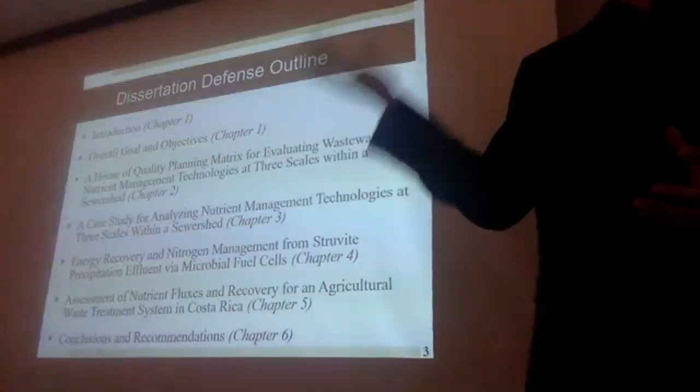So just a little bit of an overview of what I'll be covering today. Chapter 1 will be the introduction, and then chapters 2 through 5 are my 4 primary research topics. Chapters 2 and 3 are about how to select different technologies to manage nutrients. Chapter 4 is based on my laboratory work with the microbial fuel cell, and chapter 5 was based on my work in Costa Rica looking at managing agricultural waste. And then chapter 6 will be conclusions and recommendations.

This slide is probably familiar to many of you, but my work is motivated by nutrients, and nutrients come from many different sources. The sources that I'm primarily concerned with in my research are both centralized treatment plants and septic tanks, and chapter 5 will look into agricultural runoff as well. The issue is that when there's excess nutrients that end up in water bodies, it causes algae blooms. And when the algae blooms decompose, it uses up the dissolved oxygen in the water, which prevents the flourishing of aquatic life. So we're looking at ways to minimize this excess nutrient runoff to improve aquatic life. My work is also motivated by the Sustainable Development Goals.

These were developed by the United Nations, and they're in effect between 2015 and 2030. The one that I primarily interact with is Sustainable Development Goal number 6, which is clean water and sanitation.

But one of my other goals is to integrate not only SDG number 6, but many other sustainable development goals that can be integrated with treating wastewater. This includes, for example, zero hunger - if we can develop fertilizers that can be used to grow food. We can also turn wastewater into a source of energy, which leads into goal number 7. And we can treat wastewater in effective ways to reduce greenhouse gas emissions, acting for sustainable development goal number 13.

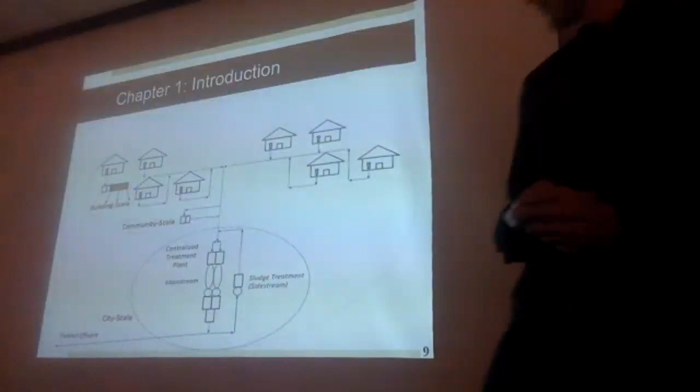One of the primary focuses of my research is this idea of managing these nutrients, not just at the centralized treatment plant. So what I have here is we can manage nutrients at the city scale, whether that's mainstream treatment or sludge treatment, and we have this nutrient-rich centrate that's often returned to the head of the plant. That's another place where we can manage nutrients.

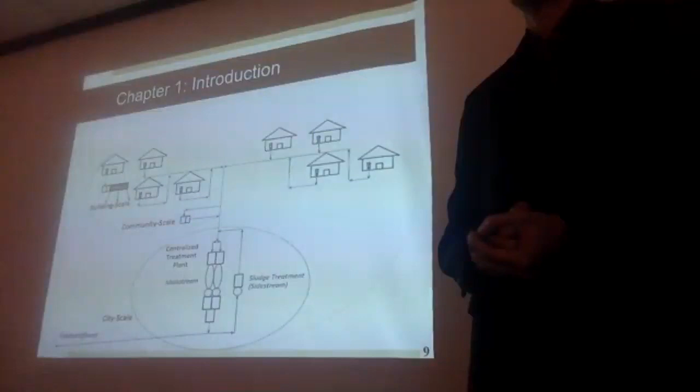But two other places that we can manage nutrients as well are at the building scale. For example, a building has a toilet - what if we source separate urine and we're able to manage nutrients at that scale? And what if we can manage nutrients at the community or neighborhood scale, where there's a group of houses? I'll be looking at this concept of managing nutrients at different scales throughout my presentation.

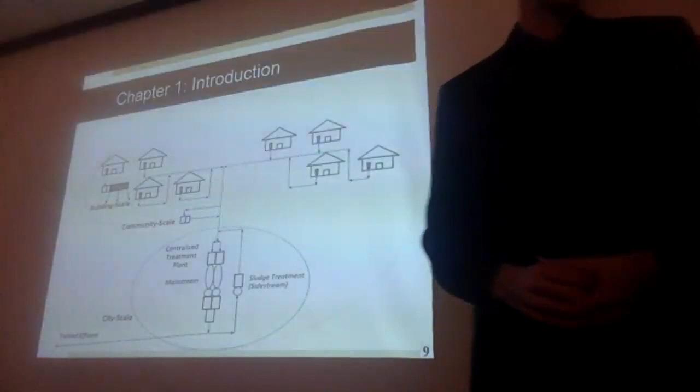So the overall goal is to contribute to the achievement of multiple sustainable development goals through the removal and recovery of nitrogen and phosphorus from a variety of influents and also at a variety of scales.

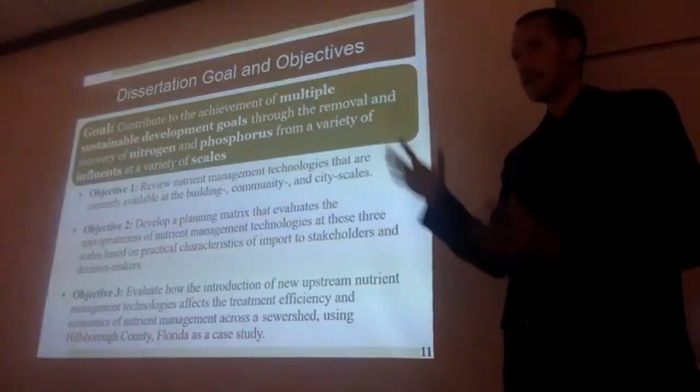So objectives 1 and 2 are looking at different nutrient management technologies that are available at these 3 scales. Objective 2 looks at how to evaluate these different technologies, how we can choose one technology over another, and at what scale it's most appropriate. And then objective 3 is looking at how to apply this planning matrix to a case study of Hillsborough County.

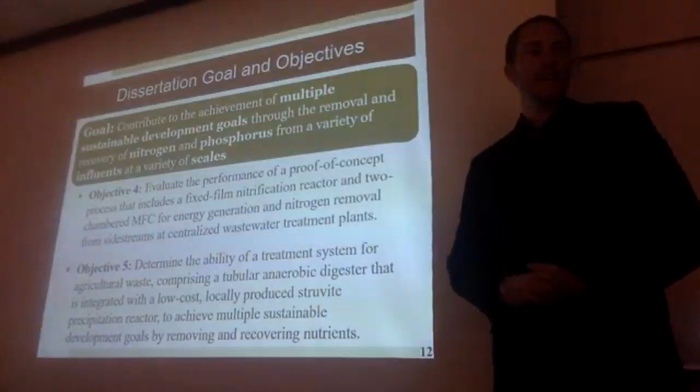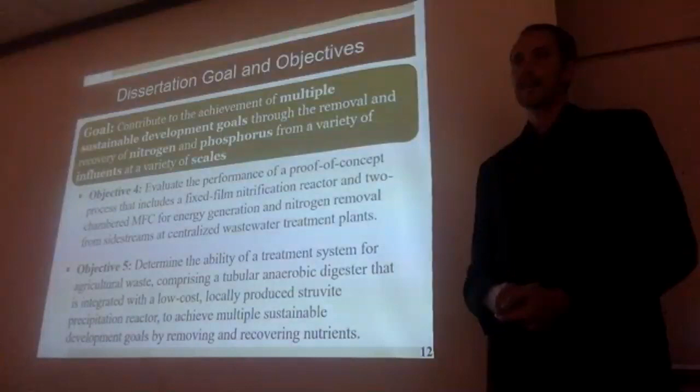Objective 4 is looking at how to use a microbial fuel cell to manage nutrients and recover energy at the side stream at a centralized wastewater treatment plant. And then finally, objective 5 is my Fulbright work, looking at how we can treat cow and pig manure using anaerobic digestion and also struvite precipitation.

So first, I'll be diving into chapter 2. This is looking at reviewing the different technologies available and figuring out what nutrient management technologies are most appropriate at the different scales. This is work that has been published previously in Environmental Engineering Science.

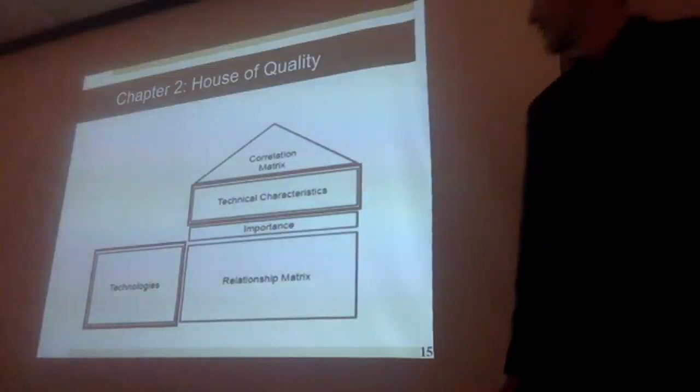So here we have a house of quality, and this is basically just a way that we can look at different technologies and figure out which one is most appropriate. The two most important parts of this figure are the technologies - we'll list all the different technologies available here - and the different technical characteristics that we can evaluate these technologies by. These different characteristics will also have different levels of importance.

So here are the technical characteristics. There are 10 of them that we used for this study. They go from ease of operation and maintenance - these are some of the things that Jeanette was previously talking about. To be appropriate, we need to consider a lot of things, including how much does it cost, is it a mature technology, how is it impacting the environment, how is it doing in removing nitrogen and phosphorus, and also, does it look pretty?

So we combine these into this house of quality matrix, and there's a lot going on here, so I want you to focus just on what's in this red box. Again, we have the different technical characteristics abbreviated here at the top, and here we have some different technologies that are available at the side stream for sludge treatment and managing the nutrients in the liquid effluent from the side stream. These different symbols here - there are 5 different symbols: minus minus, minus, 0, plus, and plus plus. Minus minus received a score of 1, plus plus received a score of 5. We basically computed these final scores by multiplying the importance factor - for example, here 0.8, this would receive a score of 2 - multiply those together, and then sum across to get a final score.

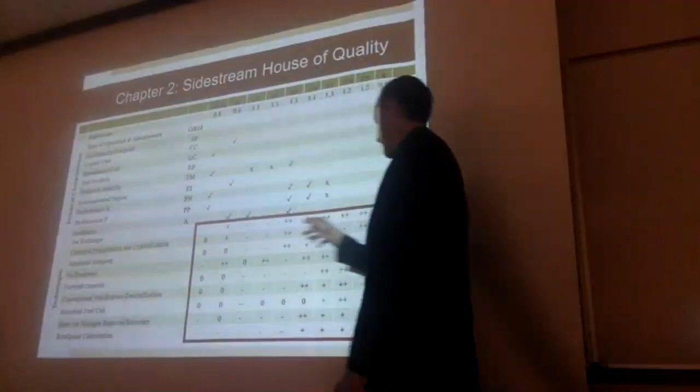So this is looking at side stream. No treatment received a score of 32. But as you can see here, there are a few different technologies that score well above no treatment. So using this tool, we can say, hey, maybe you don't currently do anything for side stream treatment. Here's some technologies, for example, that a municipality should consider at their plant, given these different characteristics and how important it is to that particular municipality.

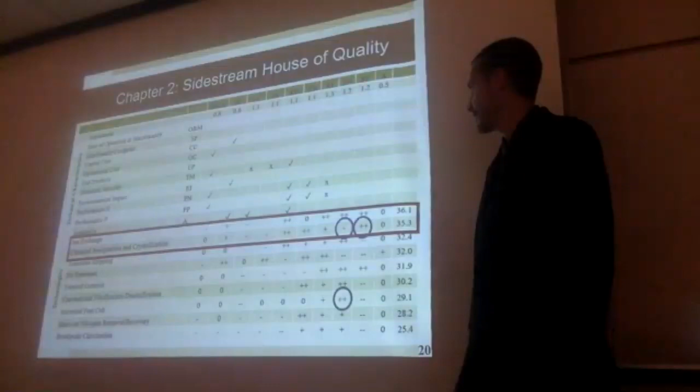So one technology that I'll be diving into deeper is chemical precipitation and crystallization. You can see here with this plus plus, it does a great job at phosphorus removal. It doesn't do as good a job at nitrogen removal, but there's also an opportunity to couple different technologies together. So for example, in a later chapter, I'll be looking into, could we couple chemical precipitation and tie that into, for example, microbial fuel cell to remove nitrogen.

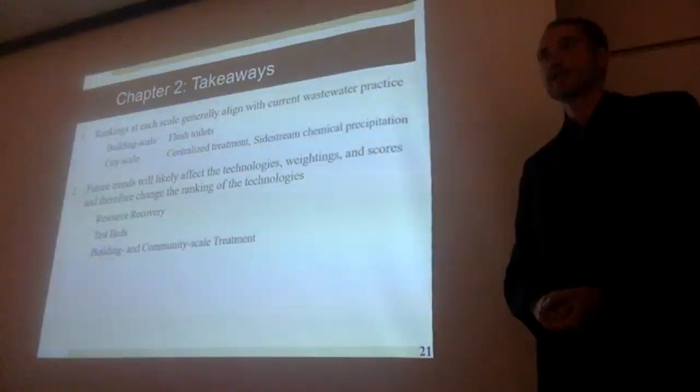So some takeaways from this chapter: the rankings at each scale generally aligned with current practice. What that meant: the building scale was simply flush toilets because they're easy to maintain. Everything flows down to the centralized treatment plant, and more facilities are now implementing chemical precipitation at the side stream. Another note here is that future trends will likely affect the technologies available and their different maturity levels.

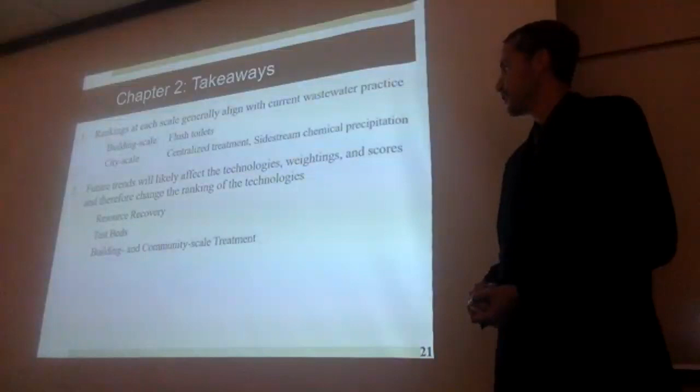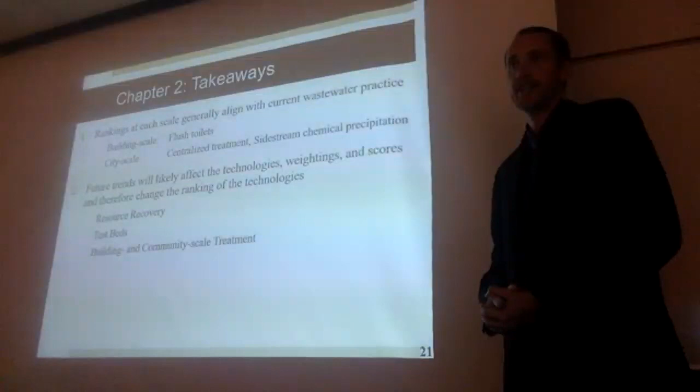So as we continue to see trends of resource recovery, we not only need to remove nutrients, but also look at recovering nutrients, energy, or water. Test beds, the ability to test these different technologies, can lower the risk factor for different municipalities to implement them. And also looking at the advantages of building and community scale treatment.

What if, for example, there's a golf course way at the neighborhood scale that's really far from the treatment plant? Does it make sense to do treatment closer to where, for example, it could be used on a golf course in the future?

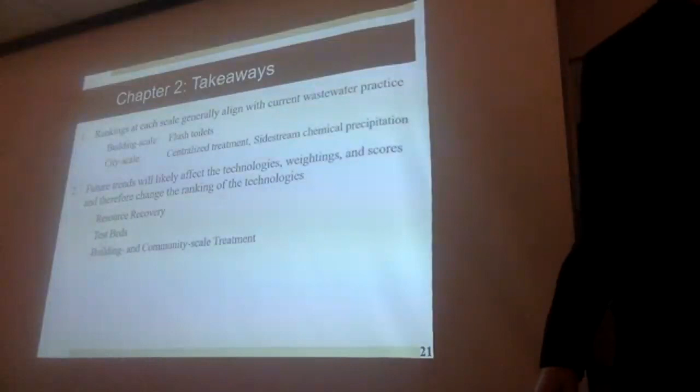So moving to the next chapter, chapter 3, this was looking at the same House of Quality tool, but applying it to a case study of Hillsborough County. So I was looking at how these different nutrient management technologies at these 3 different scales would affect centralized treatment.

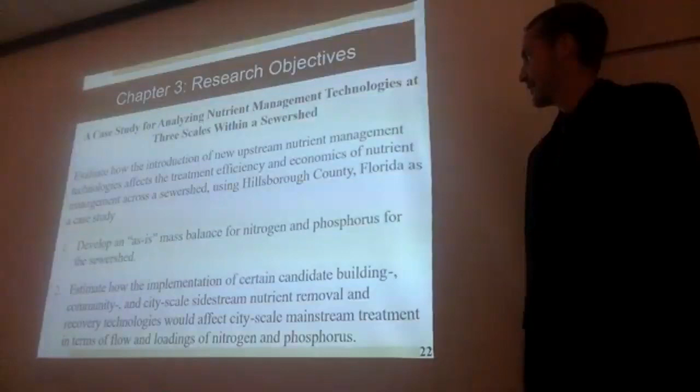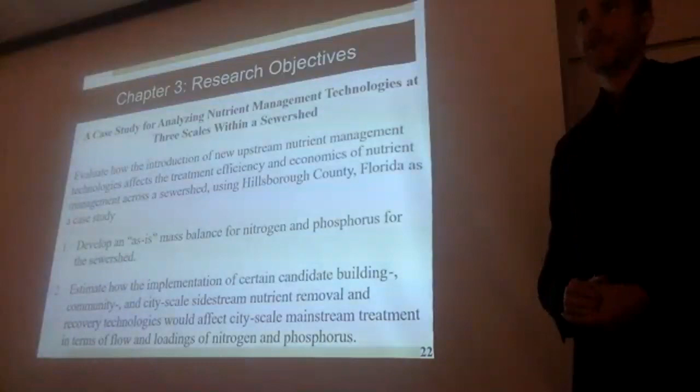So in order to achieve this objective, we looked at completing a mass balance for nitrogen and phosphorus, and then seeing how we could estimate how these different technologies would affect the different nutrient fluxes of nitrogen and phosphorus entering mainstream treatment.

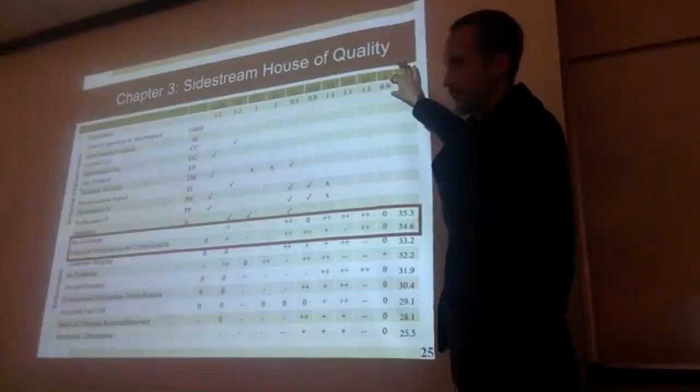So applying this, here's what the House of Quality looks like. This is using the same tool as chapter 2 and applying it to the case study of Hillsborough County. The importance factors are slightly different - these were given to us by a representative from Hillsborough County. You can see the top 2 performing technologies here are ion exchange and chemical precipitation.

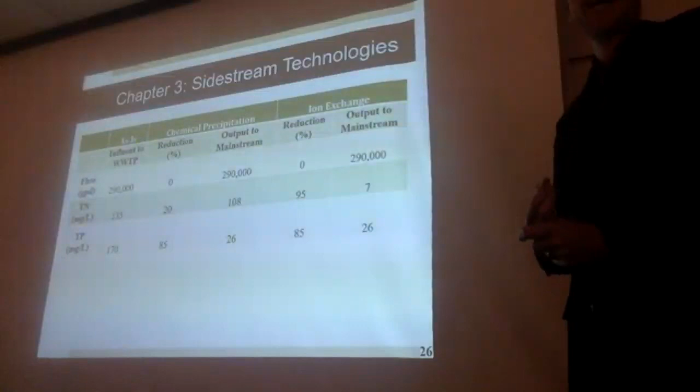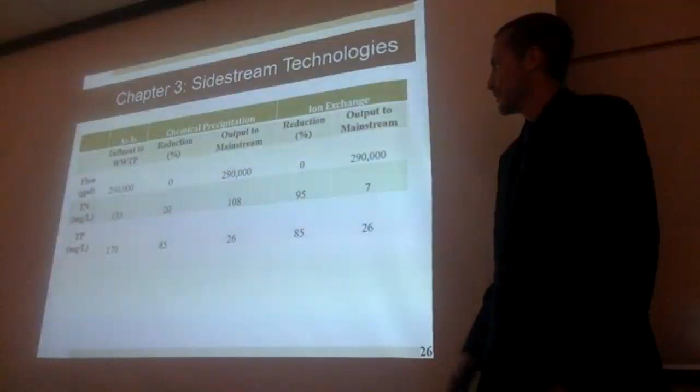So here I have a slide that looks at two technologies, chemical precipitation and ion exchange, and examines if you implemented these in the side stream, how would it affect flow, nitrogen, and phosphorus. Both technologies don't do much in terms of reducing flow, but chemical precipitation reduces total nitrogen concentrations by 20%. Ion exchange can reduce up to 95%, and both technologies remove approximately 85% of total phosphorus. So we can see this has some impacts for the fluxes entering the mainstream treatment.

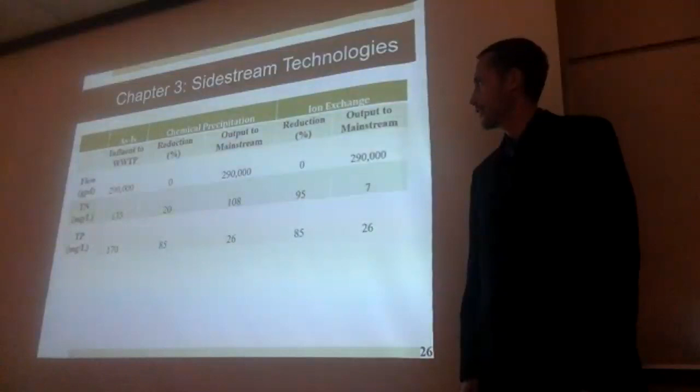For example, if you have a total phosphorus concentration of 170, with 85% removal, now you only have 26 milligrams per liter entering the mainstream. This can have significant effects on mainstream treatment if you do this at the side stream. So this same exercise was carried out with the top scoring technologies at the building scale and the community scale, and here is a summary of some of the results.

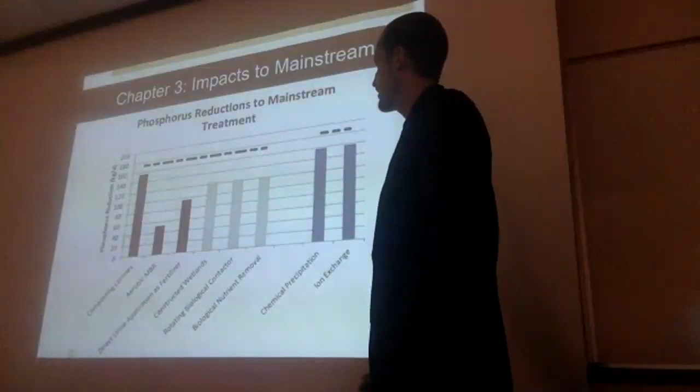So this is the same exercise, but looking at phosphorus reductions. Here we can see that just as we saw higher concentrations of phosphorus from side stream, if we want to reduce phosphorus loading to the mainstream, these bars here are much higher. So if we do technologies like chemical precipitation or ion exchange, this is the amount of reduction we can see going back to mainstream. Looking again at the building scale technologies in black or the community scale technologies in gray, we can also see some removal, some reduction of phosphorus. But the big factor here is that in the side stream, this is a great way to reduce phosphorus.

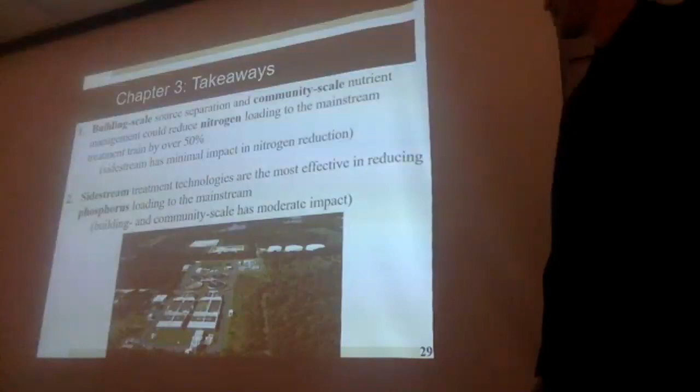So some takeaways from chapter 3: building scale source separation and community scale nutrient management could reduce nitrogen loading by over 50%, and side stream had minimal impact. But side stream did a great job at reducing phosphorus loading to the mainstream, and building scale and community scale technologies also had moderate impact as well.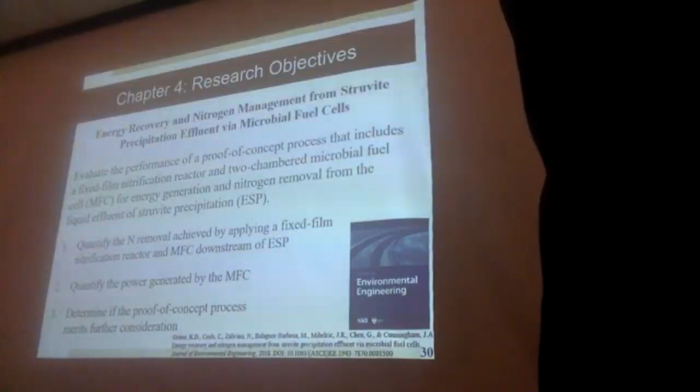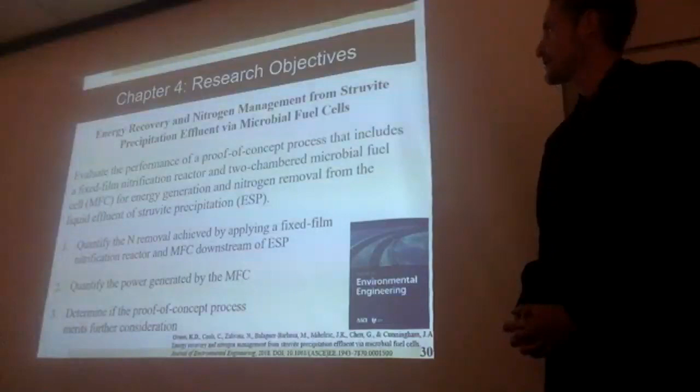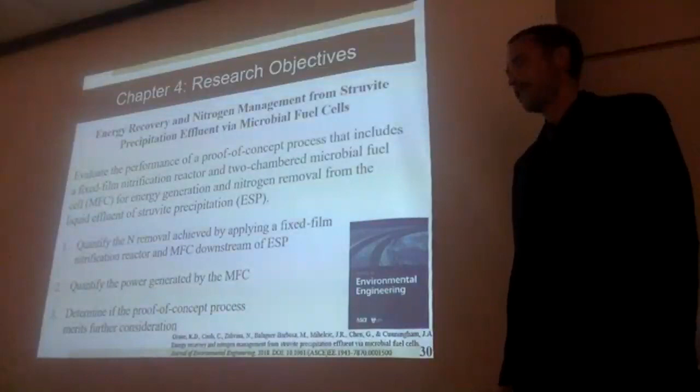All right, so chapter 4, this was looking at the microbial fuel cell. This was published in the Journal of Environmental Engineering by ASCE, and this was looking at the microbial fuel cell along with the fixed film nitrification reactor, not only to obtain energy, but also reduce nitrogen using the liquid effluent of struvite precipitation. The three specific objectives here are quantifying nitrogen removal, quantifying power generation, and seeing if these technologies merit further consideration.

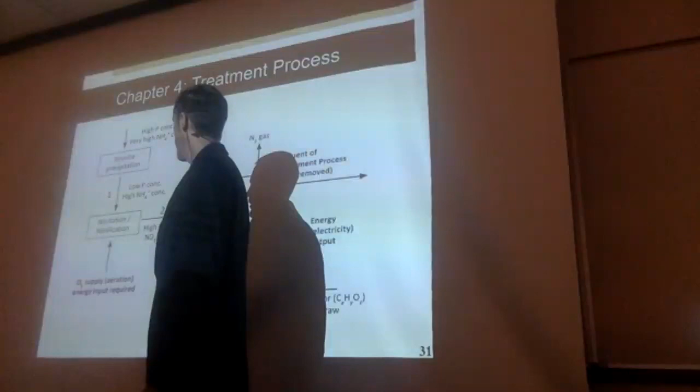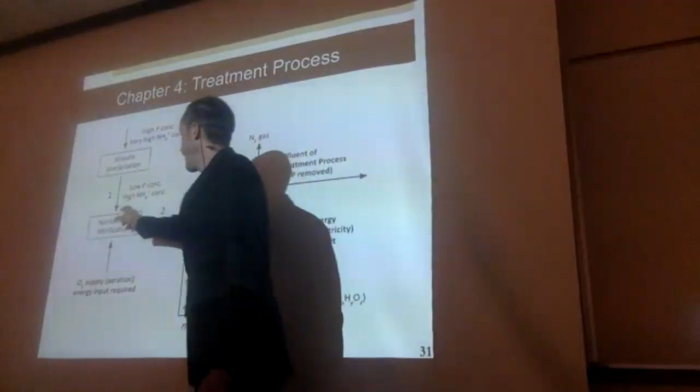So here's just a figure of what this technology looked like in the process. Here we have struvite precipitation. Entering struvite precipitation, we have high loadings of both phosphorus and ammonium. Struvite precipitation removed a lot of the phosphorus, so now we have low phosphorus concentrations, but we still have high concentrations of ammonium. This entered the nitrification reactor, and this converts the ammonium to either nitrite, NO2, or nitrate, NO3, and that requires an oxygen source. That effluent of nitrite or nitrate entered the cathode.

And here in the anode, we put in a carbon source, and through this process we were able to generate CO2 along with protons and electrons. The protons crossed the membrane, the electrons went through the circuit to the cathode, and here we have nitrite and nitrate along with the protons and electrons. Through this reaction, we were able to convert the nitrite or nitrate into nitrogen gas.

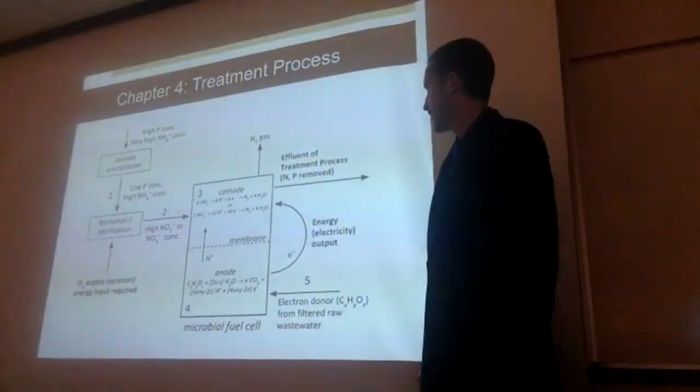So the key thing to take away here is that we're converting the ammonium and then the nitrite and nitrate from a liquid form to a gaseous form. And if it's in a gaseous form, it's no longer in the liquid. So overall, this process can generate energy here, and also in the effluent, we also see especially a lot of nitrogen removal.

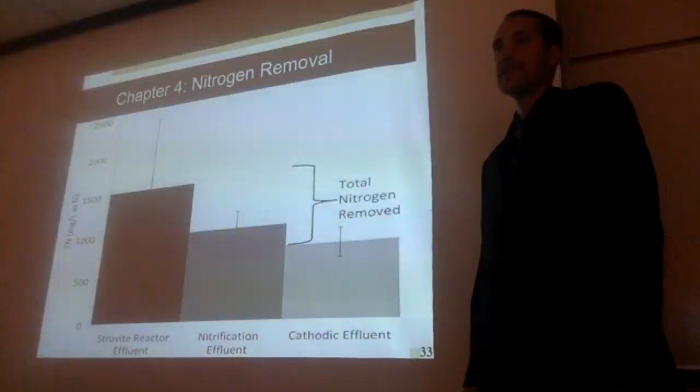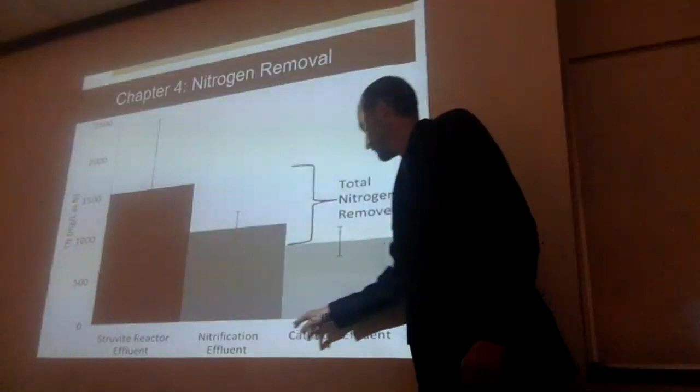We expected from the struvite reactor effluent to the nitrification effluent that total nitrogen levels would be about the same, because we were simply converting the liquid form of ammonium into the liquid form of nitrite or nitrate. However, we did see this big difference, and we saw some nitrogen removal between the nitrification effluent and the cathodic effluent. So we hypothesized that there was some simultaneous nitrification-denitrification occurring, because there would need to be a denitrification reaction to move the nitrogen from the liquid form to the gaseous form and thus lower the total nitrogen concentration.

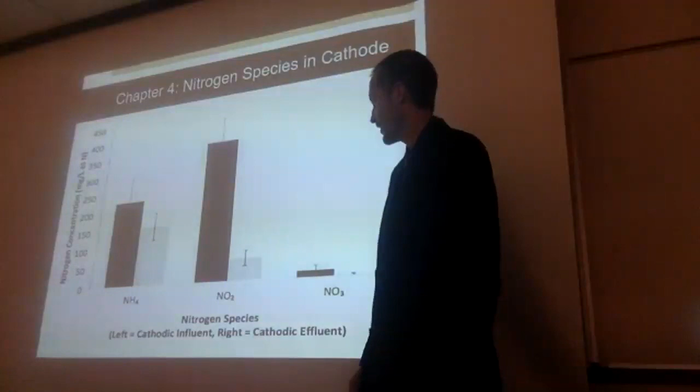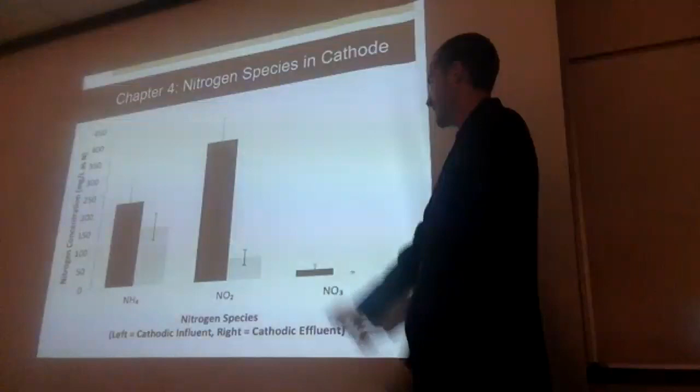So here are the different nitrogen species. On the left in black is the cathodic influent, and on the right in gray is the cathodic effluent. We can see there were moderate levels of ammonium entering and leaving. But the big takeaway is that we saw a lot of nitrite in the influent to the cathode and very minimal nitrite in the effluent. This means two things: the ammonium was being converted primarily into nitrite instead of nitrate, and that nitrite was being denitrified in this cathodic reactor. So we were able to see this big drop in total nitrogen.

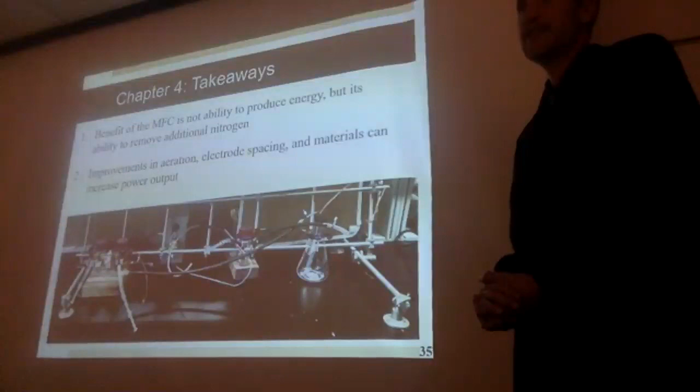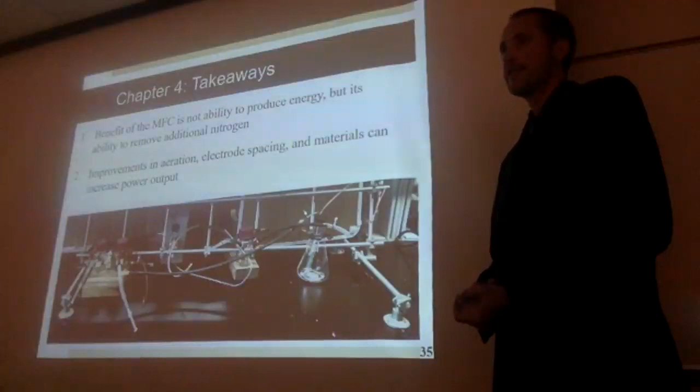So some takeaways from this chapter: we observed that the primary benefit was not the ability to produce energy. We didn't see much as far as power generation, but we did see a great ability to remove additional nitrogen, which is important especially after struvite precipitation, which reduces a lot of the phosphorus but not a lot of the nitrogen. So this is a good secondary treatment process after struvite precipitation. However, there are still many improvements that need to happen, including improvements in aeration, electrode spacing, and materials to increase power output. This work is continued by Alen at the pilot scale, working with Hillsborough County.

Next is chapter 5. This was my Fulbright work, looking at nutrient fluxes of a swine manure treatment system in Costa Rica.

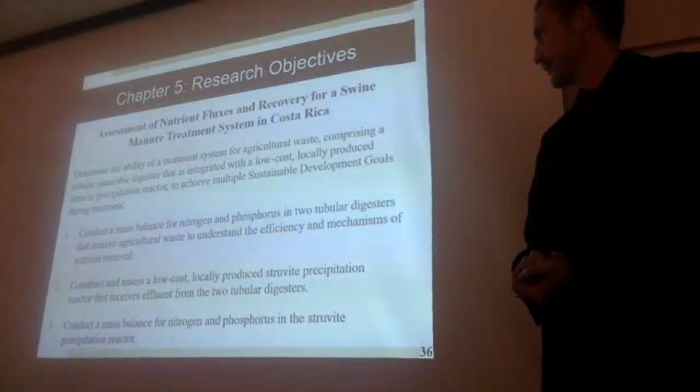The system consisted of an anaerobic digester, and then I built a low-cost, locally produced struvite precipitation reactor to help achieve multiple sustainable development goals. The three specific objectives were: looking at a mass balance for nitrogen and phosphorus in the two digesters, building a struvite precipitation reactor, and then doing a mass balance of nitrogen and phosphorus in and out of the struvite precipitation reactor.

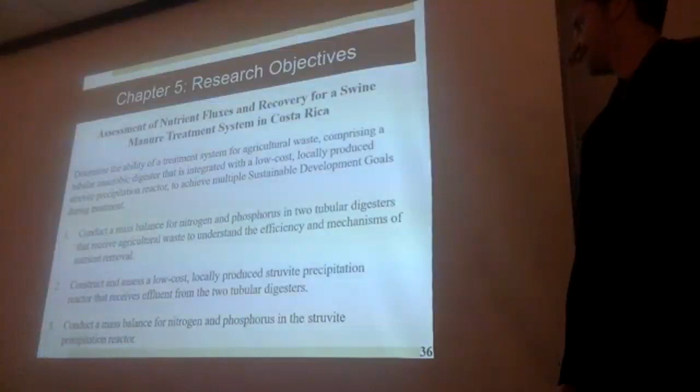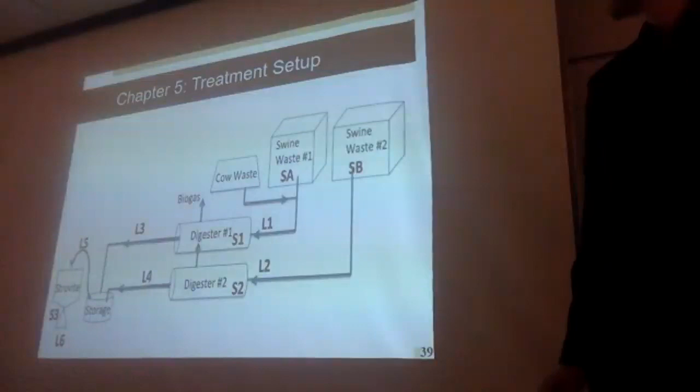So here's another figure showing the flow of the different streams. We have swine waste, and twice a day cows were milked. Any time the cows defecated while being milked, that runoff went into the first digester. A couple of years ago, they added more swine, so they needed to build a second digester to handle the additional loading.

So that was swine waste going into the second, newer digester. I collected the two digester effluent streams in a storage container, and that was placed into the struvite reactor.

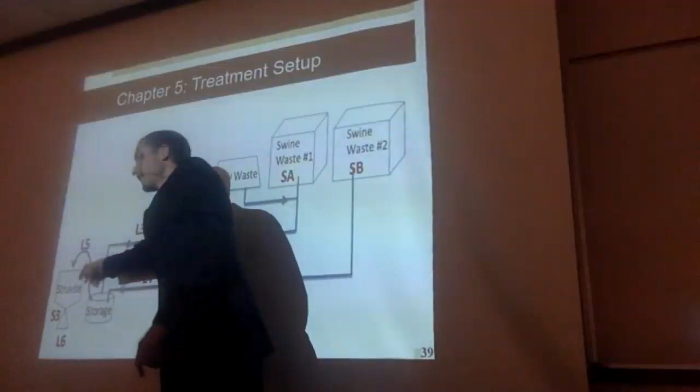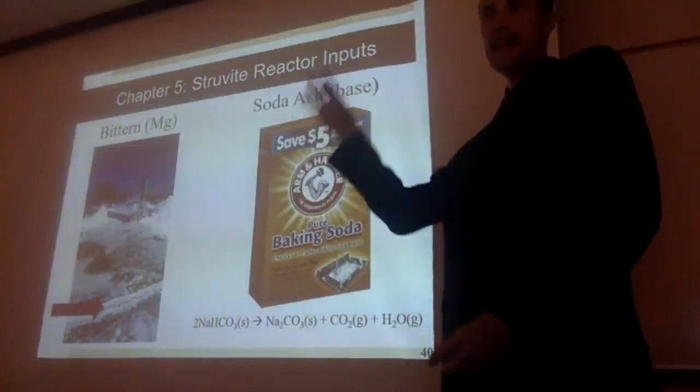There were two different ingredients needed for the struvite precipitation reactor. Struvite is magnesium, ammonium, and phosphate, and we were able to get the ammonium and phosphate from the digester effluent, but we still lacked magnesium.

Through a series of adventures, I found that a local salt production facility had a byproduct called bittern, which contains a lot of magnesium, and they were basically just dumping it into the Gulf. So I came down, got a bunch of storage containers. It was a waste stream for them, but it was something productive and useful for me, so that became the magnesium source.

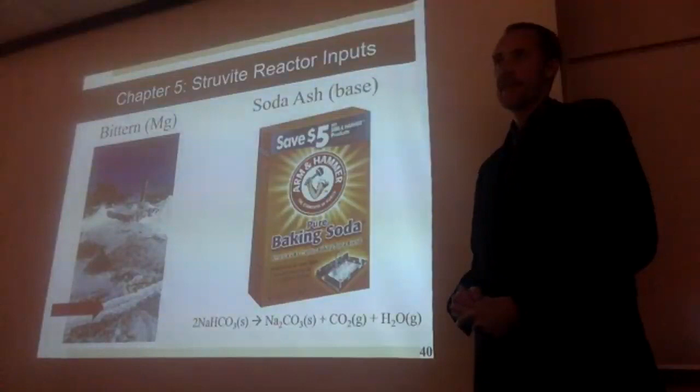We also needed to raise the pH. Struvite precipitation happens at about a pH of 8.5 to 9, and the digester effluent had a pH of about 7 to 7.5, so we needed to raise it.

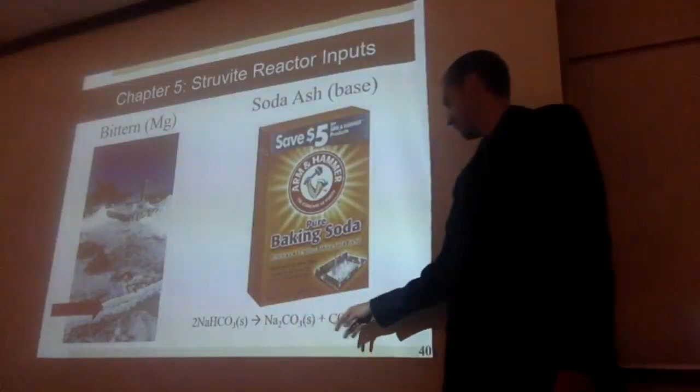We found that baking soda, if you heat it in an oven for about an hour at 100 degrees Celsius, converts into soda ash along with carbon dioxide and water. Baking soda can be bought for about $1 per pound locally, and this was a great source of a base to use in this reaction.

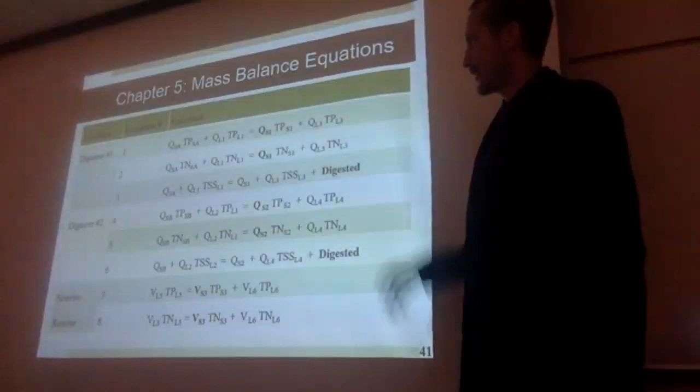All the different sampling points of the liquids and solids were entered into a series of equations to see what was happening with nitrogen and phosphorus entering and leaving digester number one, digester number two, and the struvite reactor. The simple takeaway is that I have equations for phosphorus in equations 1, 4, and 7, equations for nitrogen in 2, 5, and 8, and two solids balances as well.

So what did we see happening with the different mass balances? We saw about a 25% reduction of total phosphorus in the digesters. The numbers go from 27 to 18, and then from 43 to 36. The numbers in parentheses are the phosphate concentrations.

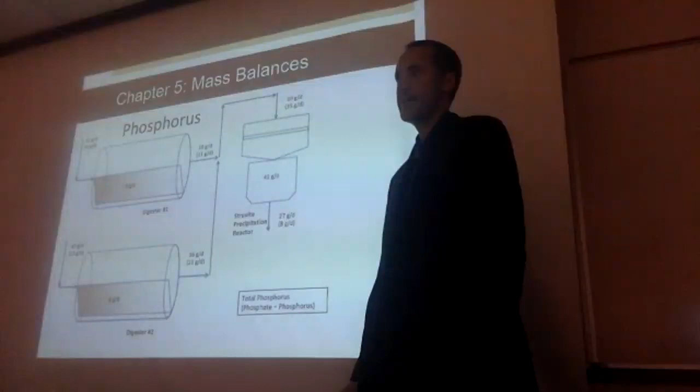As expected, the digesters were digesting the phosphorus and nitrogen. We saw phosphate levels increase from 4 to 11, and from there, 11 to 21. So there's a lot more loading in digester number 2 than in digester number 1.

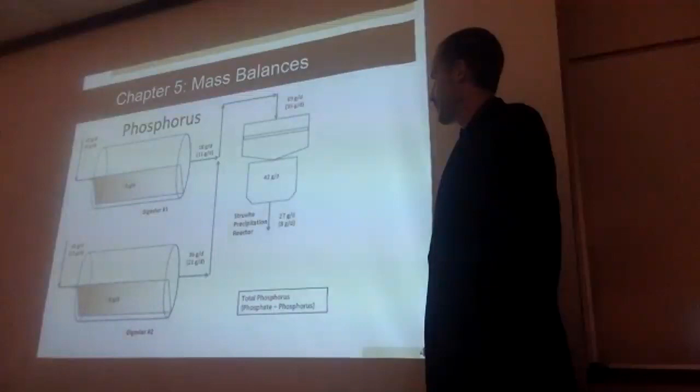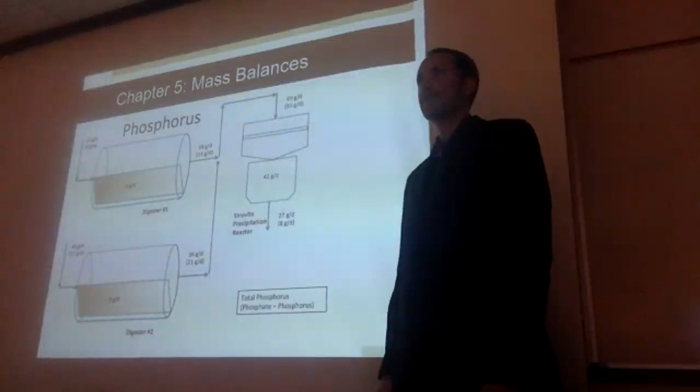We also saw in the struvite reactor a decrease from 69 to 27. The struvite reactor was a batch reactor, meaning it wasn't run continuously. I took samples in the storage container, then ran the struvite reaction, which was about a 50-liter batch. These numbers are approximations for treating the full day's volume instead of just the 50-liter batch I did. We saw about 60% of the phosphorus loading end up in the struvite, which was promising.

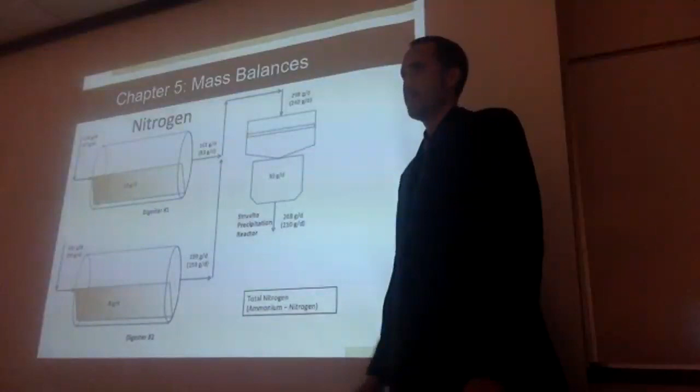This is the same mass balance, but for nitrogen. We saw minimal nitrogen removal in the digester, so most of the nitrogen continued on into the digester effluent. This is important—the digester is great at producing biogas, but isn't effective for nitrogen reduction.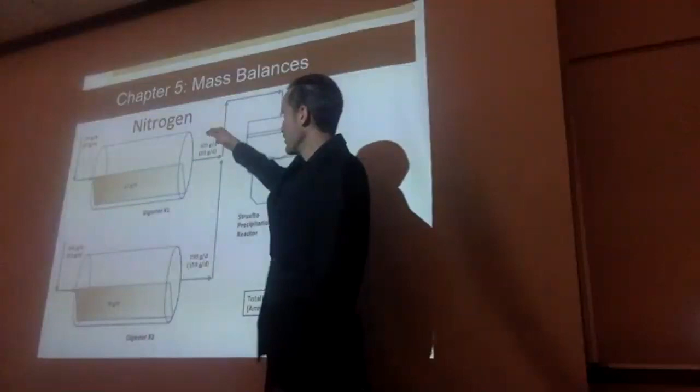We were able to see a little bit of reduction here, but we also actually saw a little bit more total nitrogen in the effluent. We think this was either because we somehow missed a bit of this digester influent—maybe this was closer to 200 instead of 199—or else possibly there was some resuspension occurring.

We did see the loading of 298 in, 268 out. So this is similar to literature values for struvite precipitation—it's really good at reducing phosphorus, but not quite as effective for reducing nitrogen.

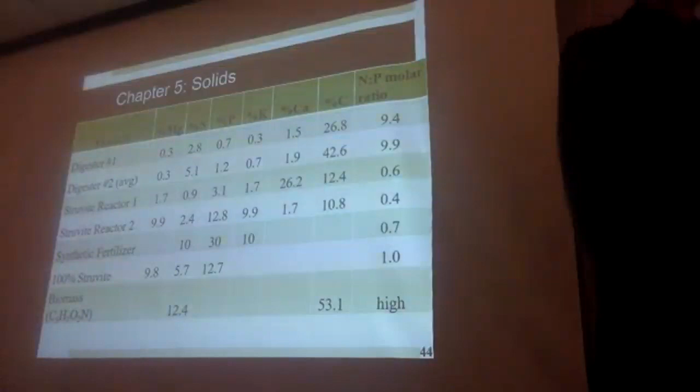So now just looking at the solids. If we were able to produce 100% struvite, we would see that it would be about 10% magnesium, about 6% nitrogen, and 13% phosphorus.

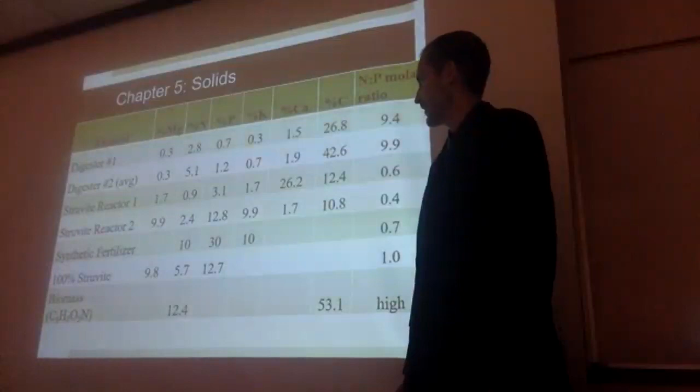From the analysis that I did at the University of Costa Rica in San Jose, we see that the solids I produced in my struvite precipitation reaction are very close in terms of magnesium and phosphorus. So that was very promising.

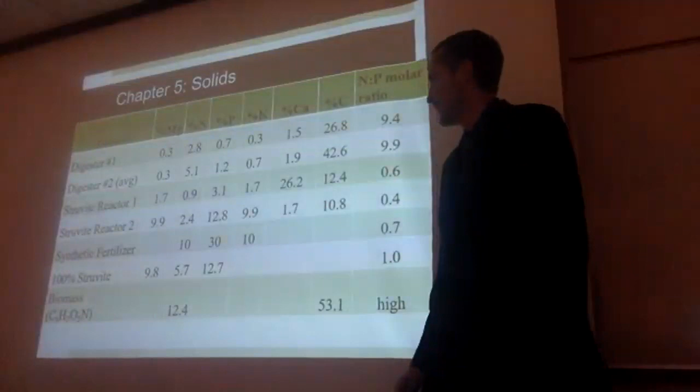This number here, 2.4, is slightly less than the 100% struvite number. We actually think that, in addition to the production of struvite, there was some potassium struvite forming. We'll see this potassium level of 9.9 in the solid we had, whereas you probably won't find that in 100% pure struvite.

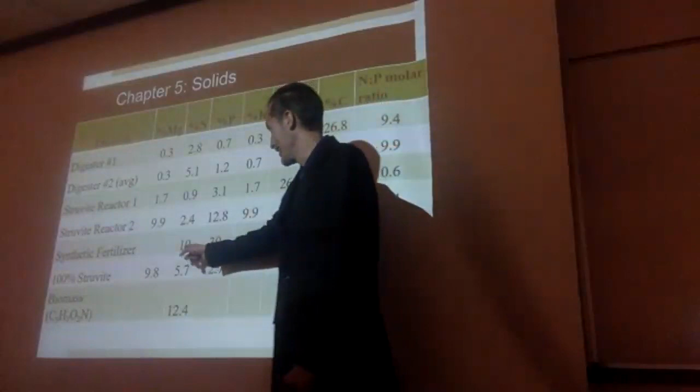So these numbers do differ from the synthetic fertilizer they currently use. The terminology is an NPK value of 10-30-10, so 10% nitrogen, 30% phosphorus, and 10% potassium. So they would need to use more of this struvite product, considering it may contain the same percentage of potassium.

These numbers of percentage of nitrogen and percentage of phosphorus are a little bit less. But the benefit of struvite is that it's a slow release fertilizer, so it's less likely to be washed off, for example. All those percentages are by mass.

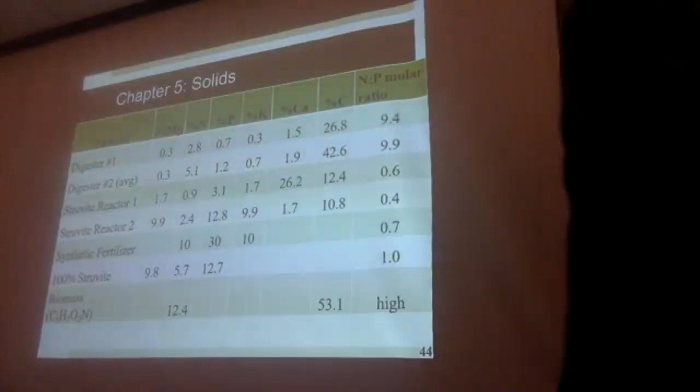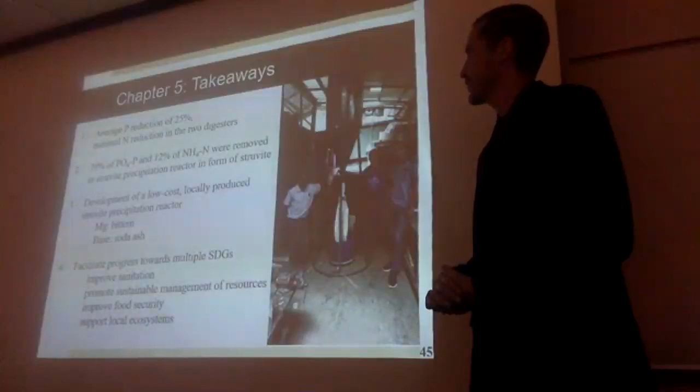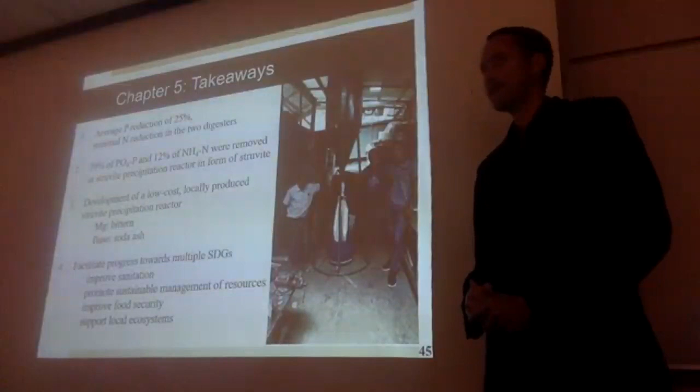So some takeaways from chapter 5: the digesters had a phosphorus reduction of 25% and minimal nitrogen reduction. In the struvite precipitation reactor, we saw a reduction of 79% of phosphate and 12% of ammonium. We're also able to show that you can use low-cost, locally produced materials to not only build the reactor, but also for some of the different ingredients, like bittern and soda ash.

This would help facilitate progress towards multiple sustainable development goals, not only improving sanitation, which is goal number 6, but other goals such as food security and preserving local ecosystems.

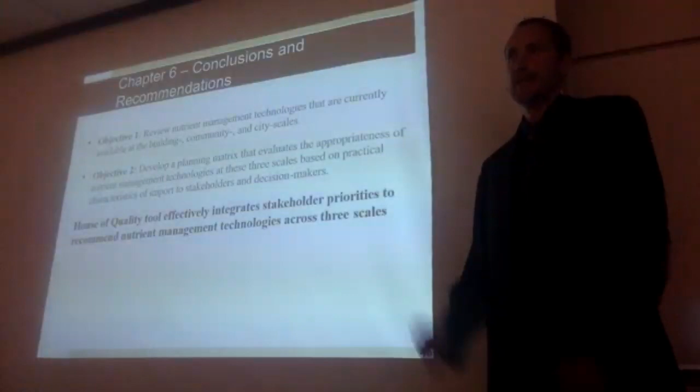Moving on to the conclusions and recommendations: the first chapter looked at reviewing some of these nutrient management technologies, but at multiple scales - building, community and city scales - and deciding between those different technologies. We were able to produce this House of Quality tool that integrated stakeholder priorities to recommend different technologies at each of those 3 different scales.

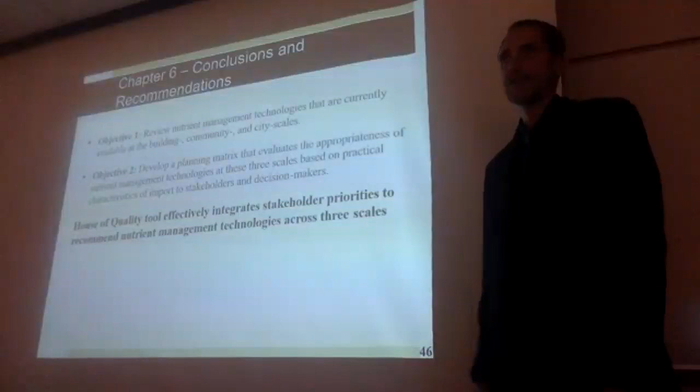Chapter number 3 looked at the case study of Hillsborough County, and we were able to show that nitrogen can be most effectively managed at the building and community scales, and phosphorus can be most effectively managed at the city scale side stream.

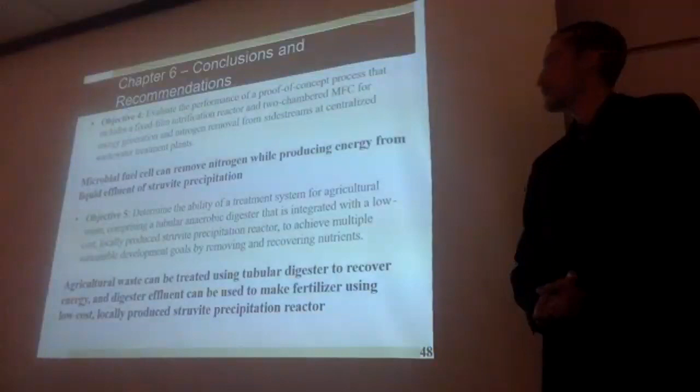Looking at chapter number 4, we were looking at the microbial fuel cell with the laboratory study, and we saw that it was able to remove nitrogen. It produced some energy from the liquid effluent of struvite precipitation.

And then in the last chapter, chapter number 5, we were able to show that agricultural waste can be treated using the tubular digester in addition to the locally produced struvite precipitation reactor.

Overall, we were able to show that removing and recovering nutrients can be done from a variety of influents, whether it's at the side stream or at the mainstream building scale, but also looking at agricultural waste as well. These are all places where nutrients occur and they all cause eutrophication, and there are lots of technologies available for all these different influents and scales.

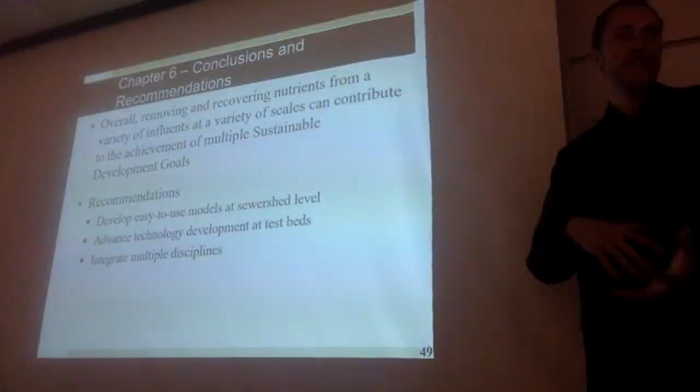So moving to the future, I recommend improving interaction with stakeholders in addition to developing easy to use models so that this research can be easily incorporated by people who are applying these technologies.

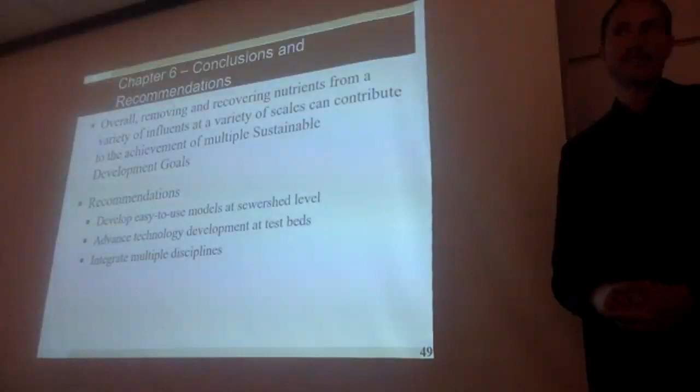Something that USF has done well, and a lot of other places, is using test beds to easily integrate some of this research into practice. And in addition, integrating multiple disciplines.

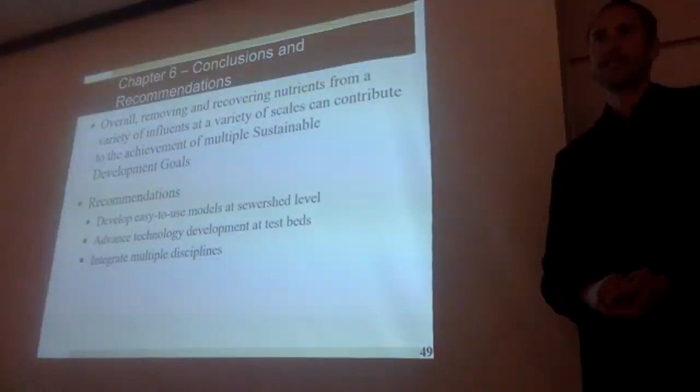It'd be great if we could see small businesses integrating with the business departments to develop these businesses. We've got great interactions here with anthropology, looking at behavior change and how these technologies are actually being used. I'm also interested in how we can integrate information technology, how we can handle big data to help us make decisions as well.